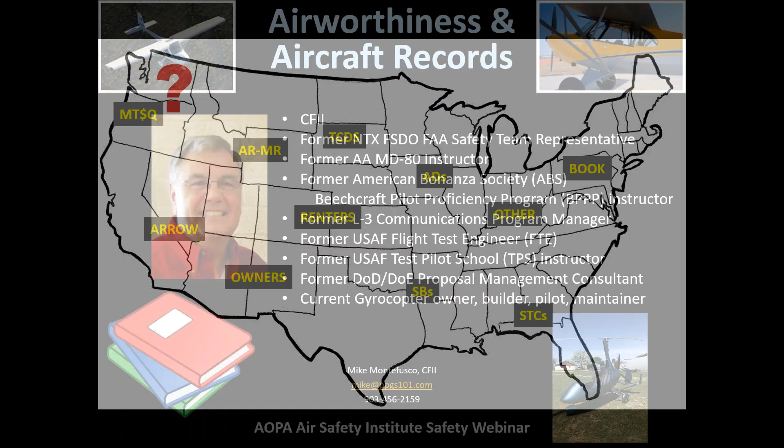Our journey through this subject matter over these 4 webinars is going to cover a lot of different things. I showed this slide in the first presentation. This is our journey. We started with the multi-thousand dollar question up there in the Pacific Northwest. Then we talked about the relationship between aircraft records and maintenance records. After that, we talked about ARROW, and then some responsibilities of owners and pilots in command, specifically for the owner side of things. Now, in the ARROW presentation, several people pointed out quite correctly that the A in ARROW was not for airworthiness. It really mostly refers to, it's an unofficial designation anyway, but it refers to the airworthiness certificate.

But after the presentation last week, I think you get the point that having an airworthiness certificate has zero to do with whether your airplane is airworthy. The only time that certificate was valid and said your airplane was airworthy was the date it was issued, whether it was 10, 20, 30, 40, or 50 years ago. It's a legal requirement that you have it, but that does not say anything about the current airworthiness of your aircraft. So this is what we covered in the first presentation.

Today, we're going to go on our journey a little bit farther. We're going to talk about things specific to renters of airplanes, and I know a large part of the population is into renting aircraft. And then we're going to talk about the first of the really deep subjects, which is the type certificate data sheets. That's what we're going to cover today.

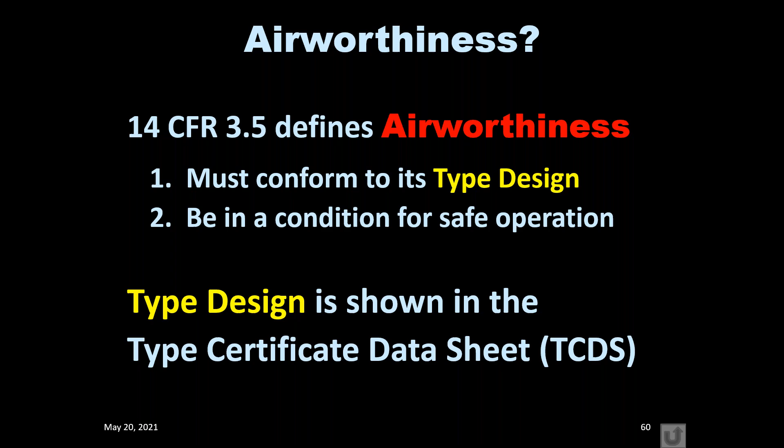Now, a TCDS. You know what a birth certificate is. That's for a child, right? It's a birthing document.

It's the record of something being born, coming into this world, for which you've taken responsibility for the rest of their lives. And you do certain things as a parent to protect and help that person grow, stay safe, get fed and clothed, go to the doctors when they need to, etc. The TCDS is the birthing document for your airplane. It's the thing that started the life of your airplane.

So Jack Tunnell is telling me about Type Certificate Data Sheets, and like many of you, that was all news to me. I had never heard about that before. So he said, yeah, you look this up, and this is how you look it up, and you get one for your airframe. And I said, great. So I ran out and I got the TCDS for my airframe. I said, wow, this is really cool. It was for that Bonanza I showed you last week. I found the TCDS, and I hold it in my hands, and I'm shaking in front of Jack. I said, Jack, look, I found the TCDS. Man, is that cool? And he looked at me with skeptical eyes and said, what about the engine?

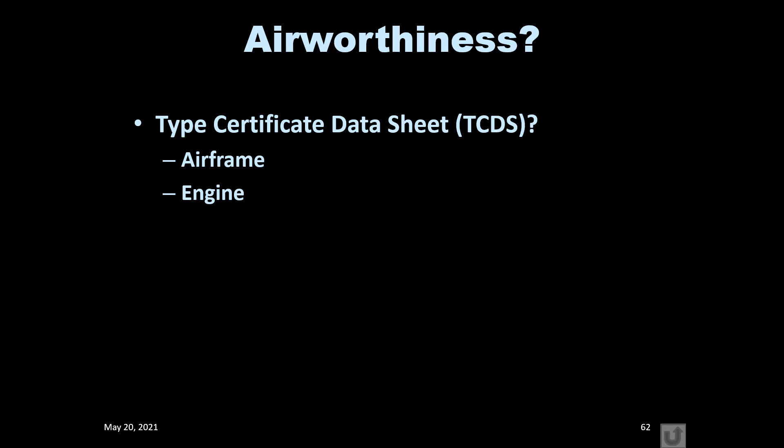And I said, huh? He said, oh, yeah, there's the TCDS for the engine, too. Okay, back to the drawing board, run back to the house, look up the TCDS for the engine. Cool. I got the airframe and engine. There's 2 TCDSs. Perfect. Run back to Jack's house. We have a cold one, and I say, Jack, I got the airframe and the engine. He looks down over his glasses and looks at me skeptically. He says, there's 3, dude. You got to get one for the propeller, too. So I run back home, go get one for the propeller. I said, dang, there's 3 of these darn things that pertain to my airplane. Holy smoly.

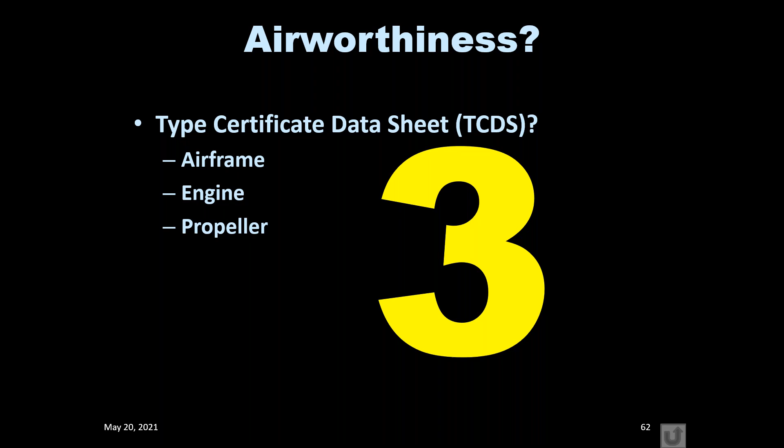But what I learned from that exercise is that there's this really cool area of information about my airplane that I knew nothing about. And it had all kinds of useful stuff in it. Okay. Now, you want to find a TCDS for your airplane. Now, this won't work for experimentals. This is for type certificated airplanes, which means it's an airplane that's built by a manufacturer. Cessna, Piper, Beechcraft, Cirrus, Mooney, etc. It's not going to be for Vans. It's not going to be for a Varga. It's not going to be for my gyrocopter. But this is for certificated airplanes.

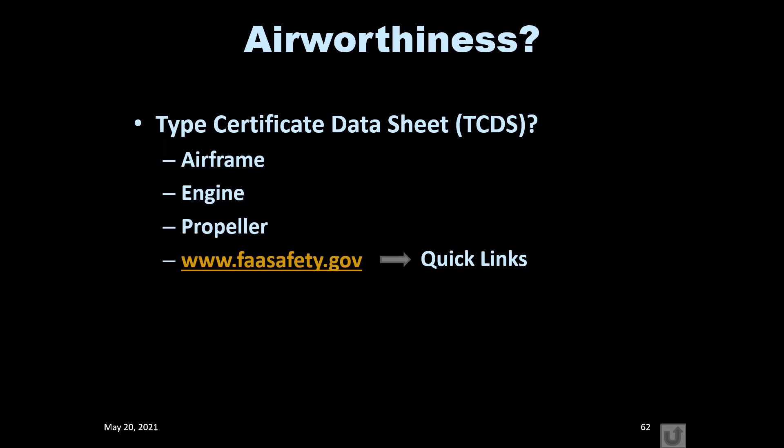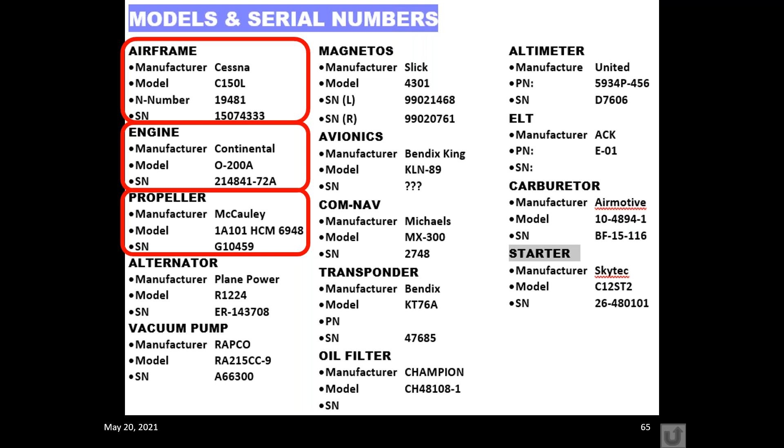So please, first thing, start making up your own models and serial numbers paper. It doesn't matter what the format is. Another handout I'm going to give you at the end of the program is a master in Microsoft Word that you can fill in as a starting point, but please feel free to tailor it in any way that makes sense to you or fits your airplane, okay? But I'm going to take this information and start looking up things.

They're owned by Textron, which is an American holding company, okay? So Textron keeps all the airplanes. And over time, the FAA has been migrating their Cessna information from the C group here to the T group. Okay, it's over in the T group. So you click on T.

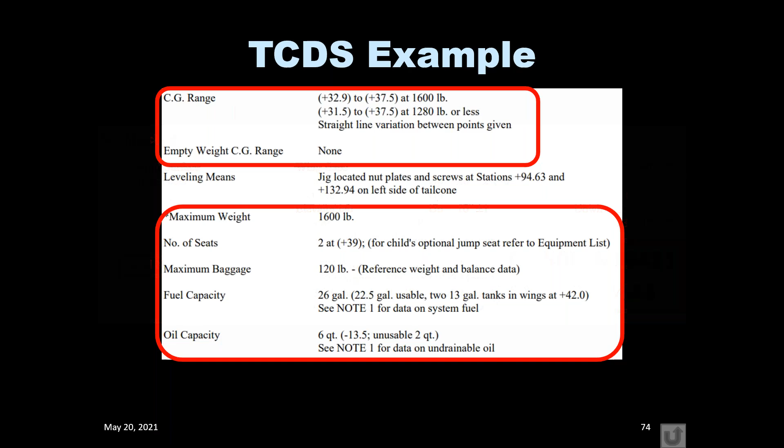Cool. Making progress. It's actually pretty easy to do. If you go through it a couple times, it becomes pretty easy.

But again, I find it useful to print this out. You can only do so much on the computer, but if I print it out, I try to save paper, print front and back if you have a printer that will do that. I have the full Adobe Acrobat system, so I can highlight stuff on the computer. But if you don't have that, just use the reader, print it out, use a yellow highlighter, and you can mark this thing up so it's easy for you to find things. When you see something that applies to you, highlight it or use a big thick felt tip marker and write on the side, just like I've done in print: C150L N19481, serial number 1507 yada yada. Write it on the page, easy to read, easy to see.

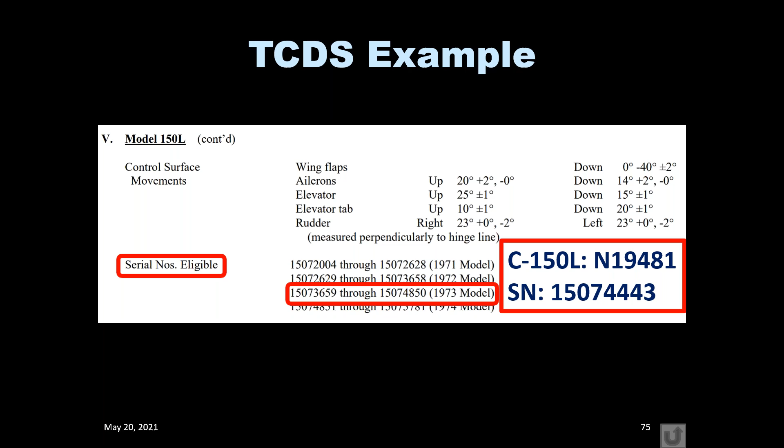Simple to do. Now I go to the TCDS for the Continental O200A engine, serial number 214841-72A. I looked that up the same way I looked up the textual information, but Continental is going to be under C, I think, at least it was when I did this. And you will see in the upper right that this is also a collector TCDS.

Because it covers a number of different Continental engines, including the O200A, B, C, D, and X. It's going to be formatted a little differently, but it's the TCDS for the engine. It's going to look different. It's set up differently by a different manufacturer, has different kinds of information. Let's go further down into this.

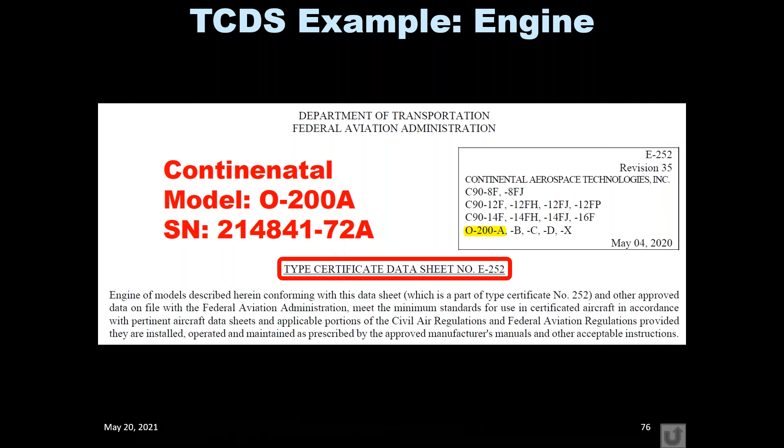We'll see that there's a table here. I print on this page — by the way, I printed this whole thing out also. I'm going to use a felt tip marker, or do it directly in the program if I have the wherewithal: Continental O200A, serial number 214, etc. on this page specifically. Then I'm going to highlight the O200A column, which is the far right column. So I know what its rating is, what its takeoff horsepower is, its maximum RPM. I can tell you it uses a certain kind of carburetor, a Marvel-Schebler carburetor, MA3 SPA, and there's some other information there that applies to this particular engine.

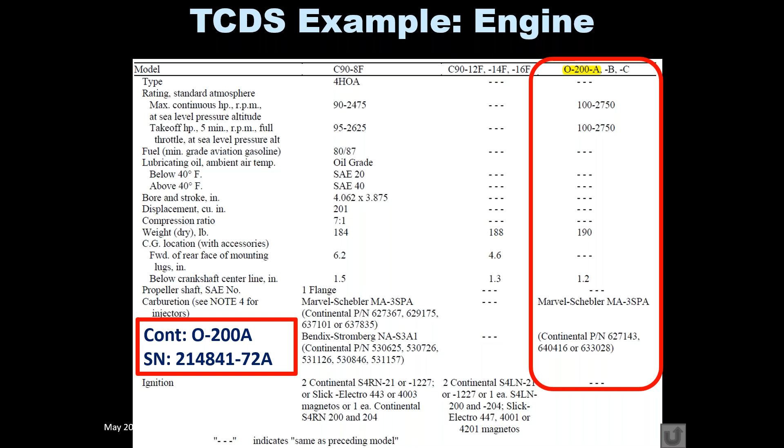I go down a little bit farther, and what do I find? I find my timing — that's timing before top dead center. If you know anything about engines, you'll know about that. It's supposed to be at 24 degrees before top dead center and 24 at the bottom dead center, okay? Spark plugs — it says C note 6 for spark plugs — and oil sump capacity, C note 6 and 7.

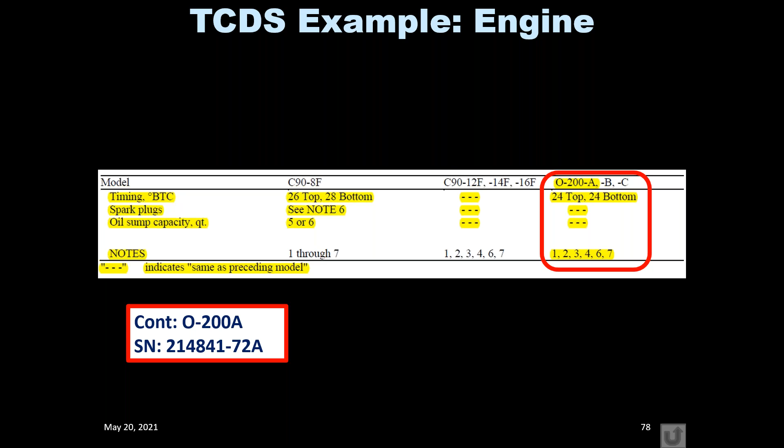It doesn't have any notes down there also, but this is going to tell you about the spark plugs. So if you have this information, now you have some ammunition so that when you talk to your maintenance vendor and ask them what they're using as a reference to adjust the timing, how they verified the timing in the annual is set correctly on your engine — you know where to look. 24 degrees before top dead center and 24 before the bottom, and you know where it came from. This is where it all started life — not in the maintenance manual, started here in the TCDS.

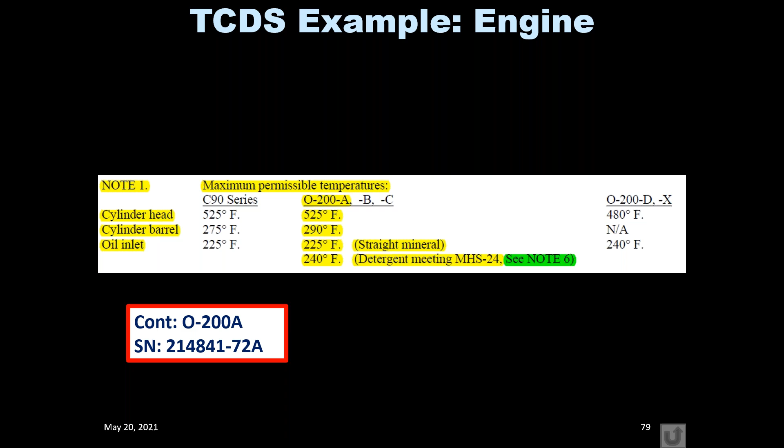Okay, so let's look through the notes. After all the TCDSs, at the very end, not in Roman numeral 5, there's going to be a section of notes, and the notes are numbered.

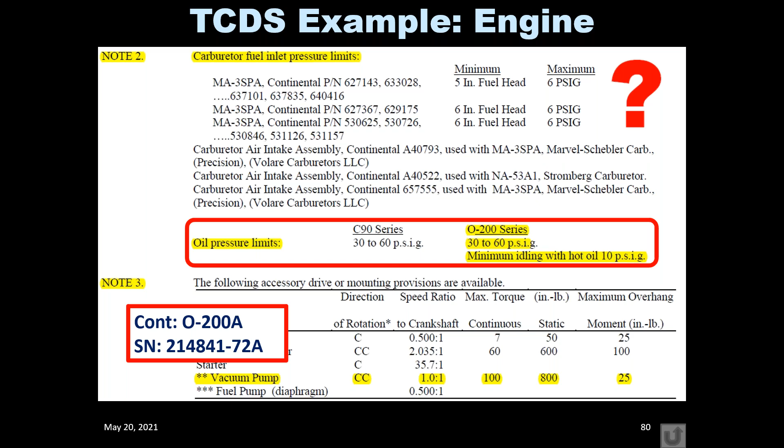Let's go on to a further note. Note 4 is about the C90 engines, O200Cs, O200Ds, O200Xs, but nothing about O200A. Note 4 doesn't apply to you if you have an O200A. You can look at the note here—it says the D is similar to the O200, but there's no paragraph that relates specifically to the O200A directly.

If I go to note 6, it says I've got to have a certain kind of detergent oil. This is the kind that you should use, so you need to make sure that you get the right oil, and you will probably get that information at the time you get the airplane. You should have that in the servicing documents.

If you have any question, this is what you bring to your maintenance person, and make sure you get the right kind of oil, know which one to buy, and make sure that person is using the right kind of oil when they're doing your annual. Now you have some ammunition because you can have a more intelligent discussion with your maintenance person.

Note 7 really doesn't apply at the first part there, but look at the bottom part—see the C90, the -8, -12, but below that, look at the bottom, O200As, Bs, Cs, Ds, and Xs. So these are the spark plugs that you can use in your airplane. You've got a choice of different manufacturers and different model numbers.

So I can put Rotax spark plugs from Rotax in my gyrocopter—they're $23 a piece—or I can use a different model that's $1.95 each. I'm going to do the thing that's a little smarter. I don't have to have a Rotax spark plug for $23 and have to buy 8 of them. I'm going to do something more economical. So this is telling you what you can buy.

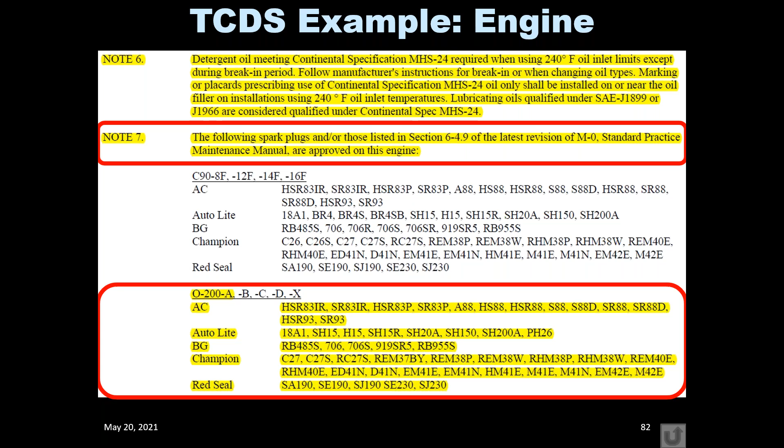Sometimes if you buy them and make sure you have the right ones, you just give them to the maintenance person and let them do it, or you take a chance on them putting the right ones in. But you need to check what plugs you have in your airplane right now. Take a look, see if you can tell, and then check it against this. You'll get smarter in the process.

Okay, now let's go to the third TCDS. This is the one on the propeller. So when we look that up, we look under M, we look at McCauley propeller. We have this number, 1A101 HCM, and the serial number. In the original lookup, it's going to say data sheet is P-918.

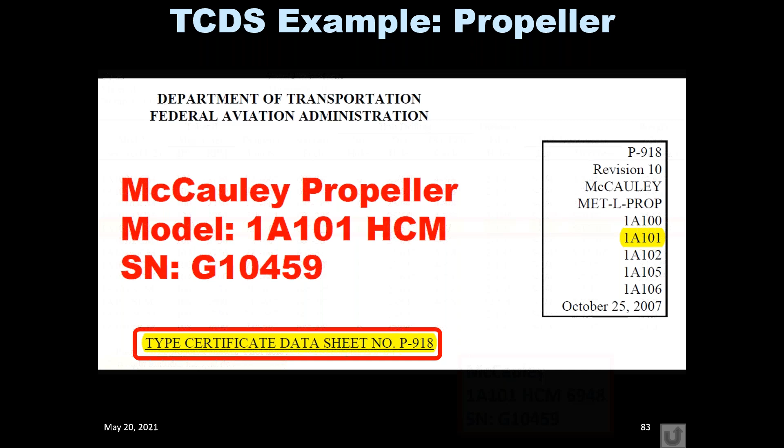And this is a little bit of a collector also—it's got several different propellers you can see on the right-hand side. We want the 1A101 propeller. Looking at the 1A101, you can see there are a lot of different addendums after that, suffixes. We don't want the MCM, the DCM, the GCM—we want the HCM. The HCM there on line 5, I've highlighted it and put a red box around it so you can see. These are the specs for the propeller.

This is how big it's got to be, 72 to 66. Why? Propeller gets shorter with time—it wears off, it changes size over time. At some point it's not going to be serviceable anymore because some things have changed. It has a standard pitch that goes from 68 inches to 38 inches as you go up and down the root of the propeller. It's a 6-hole.

That's how it attaches to the hub. The diameter of the holes—they're 25/64 inch holes. The bolt is 4 3/8 inches, etc. The hub diameter and so on. And the weight is 25.7 pounds, and that weight includes an integral dowel spacer. So this is all the information.

Now, you're not the maintenance person—I know that.

You know that. What I'm trying to do is arm you with good information, or at least to know where to find it, so that if a question comes up or you want to learn a little bit, you can approach your maintenance vendor and ask that person to show you certain things. And over time, you will learn a little bit at a time. But you have to know how to ask a question. And the only way you can do that is to understand where some of this stuff came from in the first place.

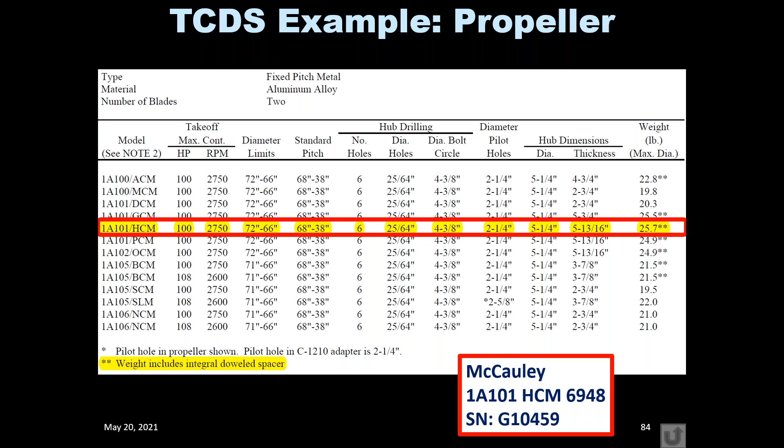Okay, now I go back to note 1. This has notes in it also, and I go down and you see it's 1A100 MCM, ACM, and finally down here near the bottom, 1A101 HCM has a SAE1 flange propeller shaft with McCauley such and such spacer, must be installed with McCauley drawing B4352. Well, I think I would work to get a McCauley drawing B4352 and have that in my maintenance records, so that I could make sure that with the airplane, I have that information.

Now, your maintenance person should have that, because they can't check if it's been installed if they don't know what's in the drawing. If they don't have it, you got to ask yourself, why are you using this maintenance person? How can they check to see if this is done properly if they don't have the drawing? So make sure you have the drawing, and it's not hard to get. Okay, look at the McCauley website.

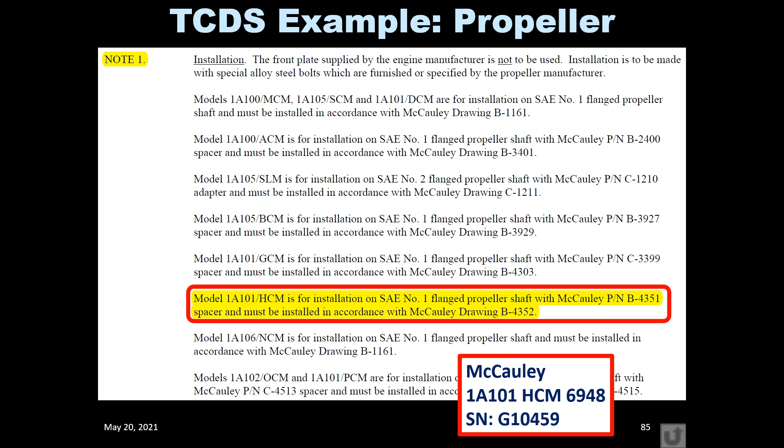Okay. Also, later on in this TCDS is the secret decoder ring, the propeller model designation. Tells you what these different numbers mean. So ours, remember our number said 1A101 HCM 6948. So what does that mean? Well, the 1A100 is what? The basic design number. The HCM is going to be what? It's a certain kind of a flange fitting. Okay, it's got an HCM flange fitting.

The first two digits after the HCM have to do with the diameter of the propeller in inches, so it's 69 inches on our prop, and the pitch at 75% of the radius, going outside the radius, is in our case 48. 48 is the pitch. Okay, so that's how to read the propeller information. We go down further, we go to note 9, we see no other notes in this section. So this is telling you what propellers you can use with which engines. So it doesn't give you the 1A101 HCM cannot be used with any other series of engines.

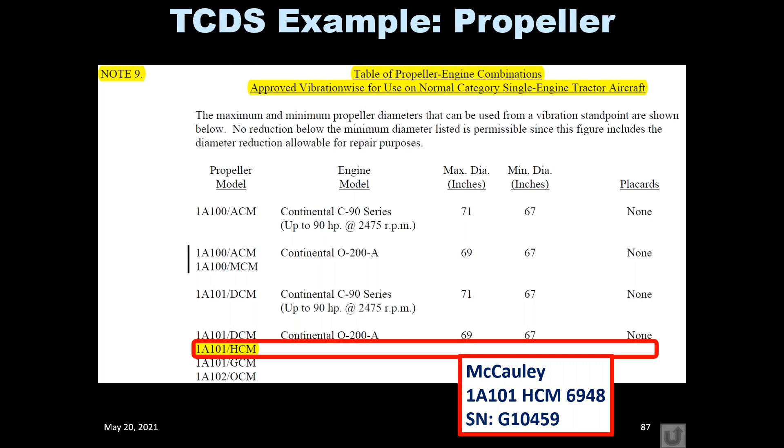All right, and that's going to conclude what we're going to cover tonight. I think that's enough to chew on. I can't emphasize enough, before we go into the AD section, please try to at least get started on your master models and serial numbers paper, so that you have that handy next time. It's going to mean a lot. With that, John, I'm ready for you to come back.